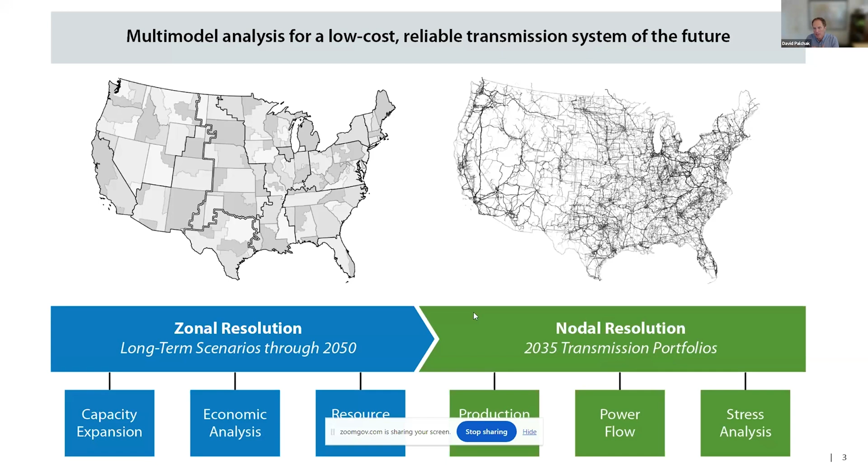So we do that for a few scenarios, and I'll show some examples. Overall, we're trying to get a lot of scenarios, understand the future challenges, and come up with several good solutions, hopefully.

As we build out our scenario framework, the most important part is our different transmission frameworks. You'll see these four transmission frameworks referenced in the coming slides, so I'll take a minute to explain them.

Our limited scenario is our reference scenario. Here we're basically trying to limit the amount of transmission that can be built across the US, so we don't allow any new interregional transmission. By interregional, I mean across the FERC 1000 plus ERCOT regions, so 11 different regions in the US. We don't allow new lines across those interregional seams, shown as black lines there.

We're also limiting the total amount of transmission to recent observed maximums. You'll easily see this in some of the results. We're looking at essentially the last decade, the last 15 years, at what was the maximum observed, and limiting the total amount of transmission that can be built in our capacity expansion model in this scenario.

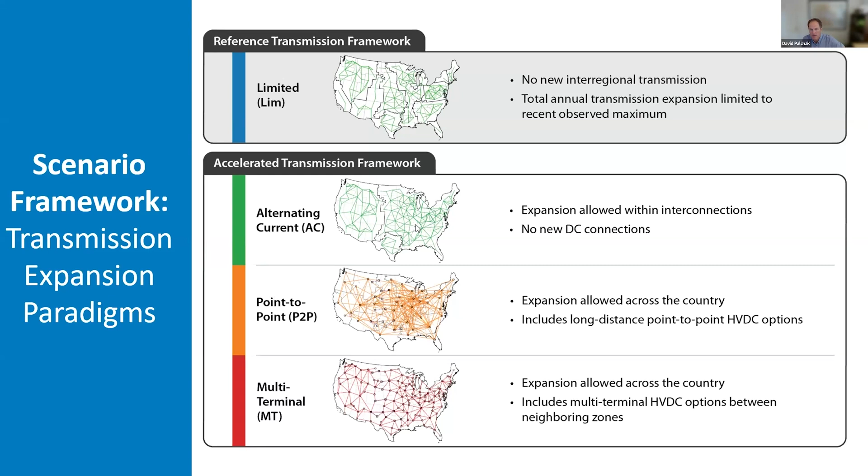Expansion is allowed across the country in our two HVDC scenarios, across the three seams between the eastern, western, and ERCOT interconnections. Sometimes we'll refer to those as our HVDC scenarios. So those are the four transmission frameworks or paradigms.

To expand our scenario matrix, we're also bringing in different demand growth. In the top right corner you see three levels: low, medium, high, which essentially goes up with more electrification of the system. I'll mostly refer to the mid demand in this presentation. In our high scenario, there's a lot of electrification by 2050. High is about 3% growth, mid is about 2%, and low is about 1% growth nationwide.

We also look at three different emissions targets. Current policies is essentially what was in the books by last summer—any state RPSs as well as the Inflation Reduction Act. Anything that was law by last summer is in our current policy scenario. We also have two emissions target scenarios: 90% CO2 reduction by 2035, as well as 100% by 2035. That's the White House target, but not a law. These are just our different decarbonization scenarios for the emission target.

So this is 36 total core scenarios, and this can be a little confusing. Ultimately we're trying to get a sense of the future and understand the role of transmission across these many possible futures. I'm not going to go into a lot of results on all of these, but this is how we set it up, and a lot of our results pull simple, common findings from all of these.

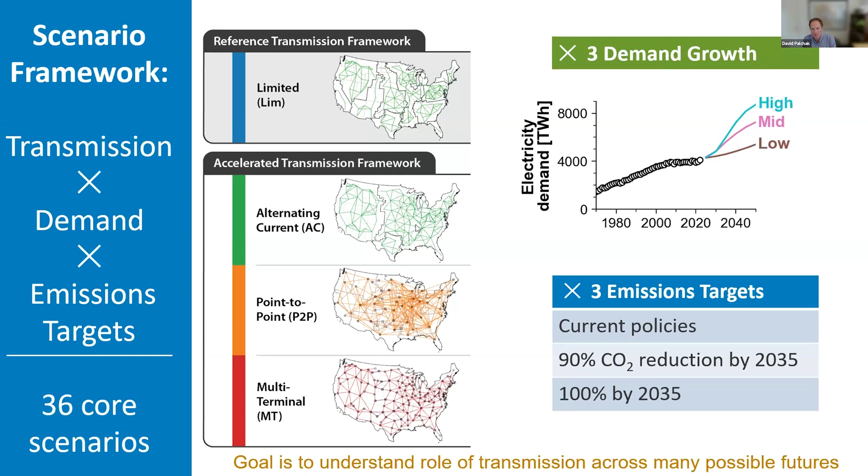I'm going to focus mostly on the mid demand, as I said—again, there's the demand chart. We sometimes call this our central decarbonization scenario, so I might refer to it as that. So a couple of results on this specific scenario.

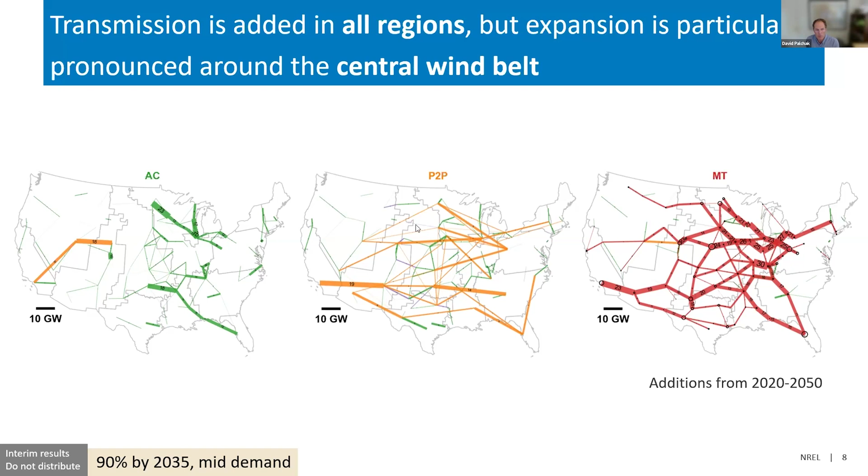Somehow I cannot hear David—can you?

Excuse me, Yohan? Oh, we lost you for a little bit. Am I back now? You're back, yeah. Sorry about that.

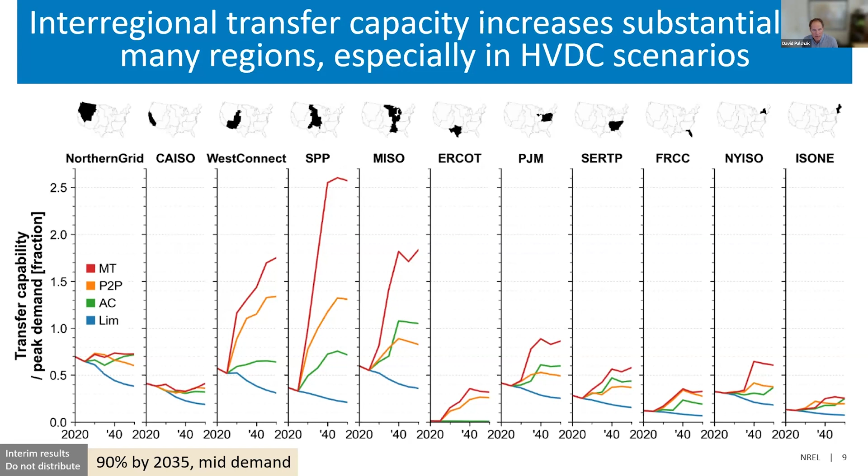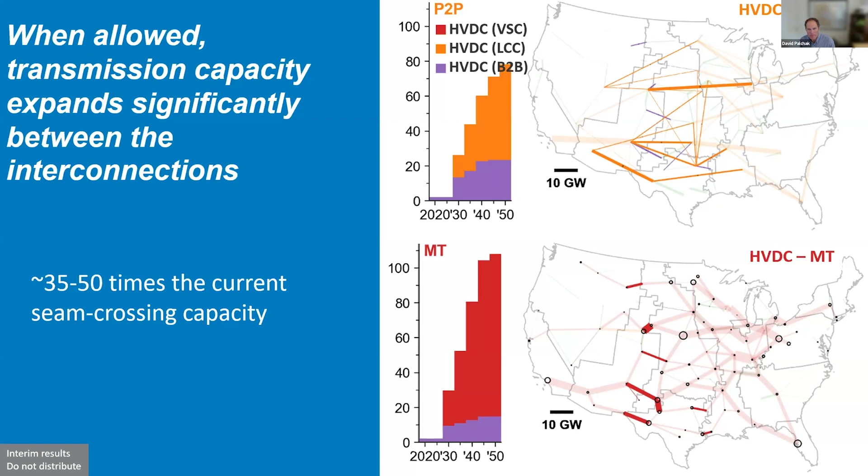So just to explain the charts a little bit - we break up our different HVDC technologies into the LCC and the VSC, and you can see them highlighted here on the map. They're also the back-to-backs that are expanded in some cases in the point-to-point specifically. So a lot of seam crossing capacity built when we allow it, especially when you compare it to today's.

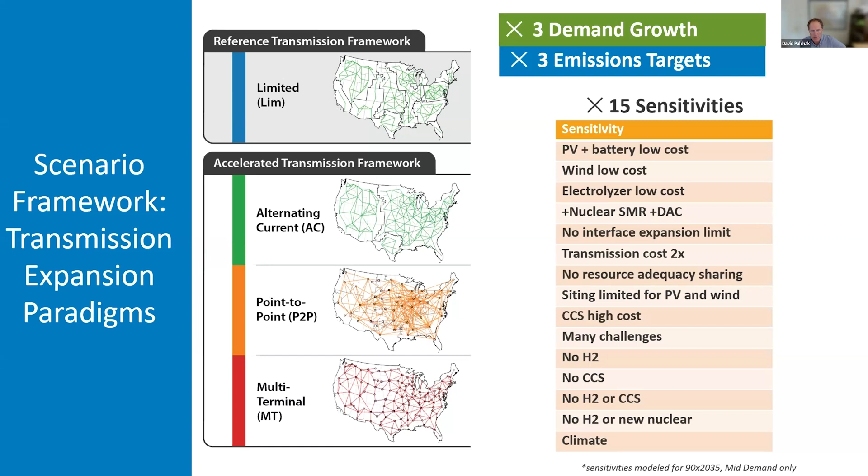If you go to the bottom, you'll also see we changed availability of different technologies, some maybe nascent technologies in the case of H2 and CCS or new nuclear - taking those technologies in and out to see what impact that has on the role of transmission in the future.

And to just kind of fly over what that looks like. So the spatial distribution of transmission is robust across a lot of these sensitivities. So the core scenario in the top left is what I showed previously for the AC paradigm. And if you look across all of these maps, this is the sensitivities of that paradigm.

At a high level, one of the good things is there's a lot of common solutions here that gives us some confidence that a lot of the solutions that we can come up with and distill from this would be common in many, many futures. So that's kind of one of the reasons we look at these maps and run all of these sensitivities, is to try and pull out the lessons across many of them, as well as some of the other additional lessons where you get down to the bottom row here, where we don't have some of the technologies.

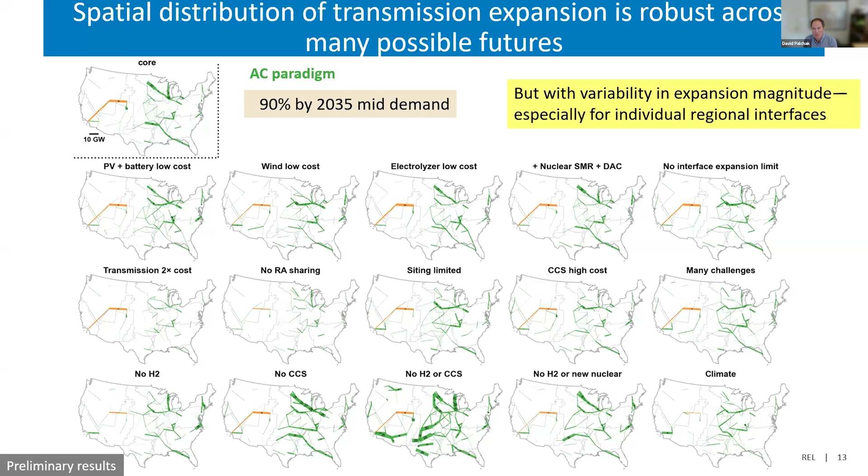Transmission has the potential to become even more important in those futures. But certainly a lot of variation in here as well.

So when we take all of those maps and try to distill them into a single map that we can actually move forward with, what we get is this. We call this the high opportunity transmission. So this is showing the new interregional transfer capacity that was essentially robustly developed across our sensitivities. So we cut off this number with, it had to be in 75% of the sensitivities I just showed. So if it wasn't in 75% of them, it didn't make it onto this map as our high opportunity transmission interface, just to give some perspective on how big the transmission still is, even with that somewhat conservative estimate.

If you look over at the PJM East MISO Central corridor, that is about 28 gigawatts now in 2024. They're looking at an expansion out to 2035 in this case by another 12 gigawatts. So a pretty large expansion. And then if you look out west in the Northern Grid South and West Connect North connection, it's about 2.5 gigawatts now, and they're looking at additional expansion of 6 gigawatts across our sensitivities. So still big expansions and a lot of opportunity here that is robust in a lot of futures.

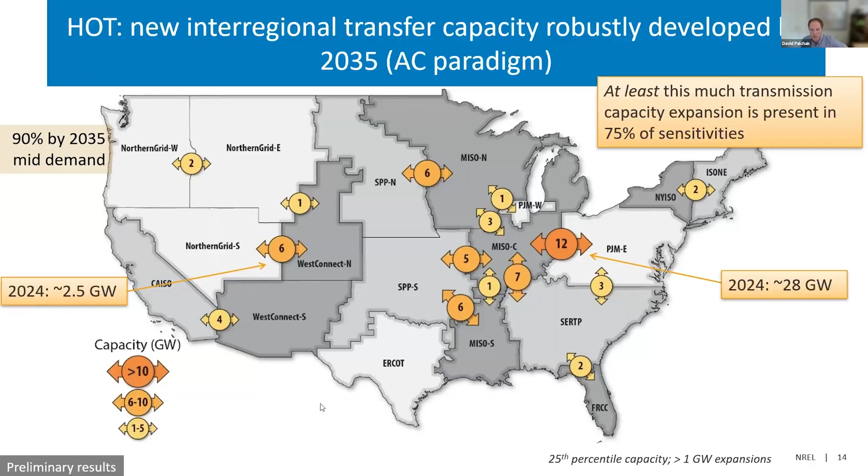So I'll quickly go through a couple examples of our nodal scenarios. So we ran 3 different scenarios nodally. It's quite intractable to have all 100 scenarios modeled, but this is really just to do some detailed kind of transmission planning and look at the engineering challenges of implementing these solutions. Certainly not a plan that we expect or is not a plan for the US, but really to try to validate and test our solutions.

And also look at analysis of grid operations, the scheduling challenges and the balancing challenges as well. Get some insights about how these futures could look. So these are our 2 nodal implementations of the AC and the MT HVDC. So that's kind of our HVDC scenario in this case kind of encompasses characteristics of both of our HVDC scenarios.

And ultimately, you see a lot of transmission, new transmission built. That's the highlighted lines here. A lot of 500 kV in our AC case, as well as some additional voltages, largely maintaining voltages within regions in some cases. And then our MT, getting into kind of a very transformative scenario in this case, a lot of connections across the seams, across the east, west, and into ERCOT from both interconnections. So kind of very interesting implementations here.

Ultimately trying to examine some of the engineering challenges and the operations and validate that these systems that we're looking at that are sometimes transformative are implementable when you start to get down into more detailed modeling. But again, just in the modeling phases here.

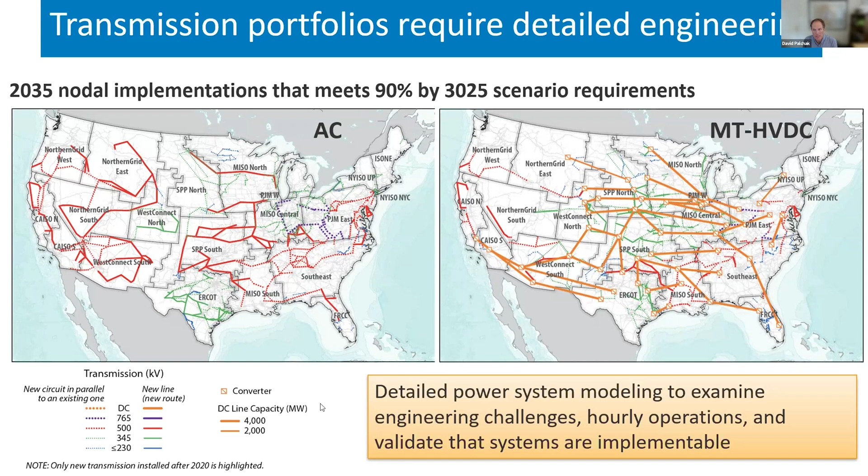So just to summarize here, so there's rapid and significant transmission expansion, and ultimately the HVDC scenarios build the most transmission. There are a lot of common transmission solutions, as we saw, and then the detailed modeling helps to validate that these are implementable, at least to the extent that we can model them, in those few scenarios. So I'm gonna stop there.

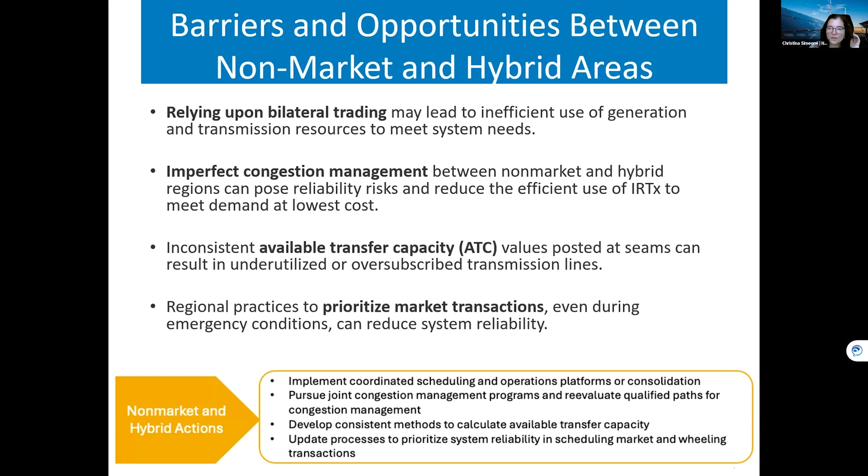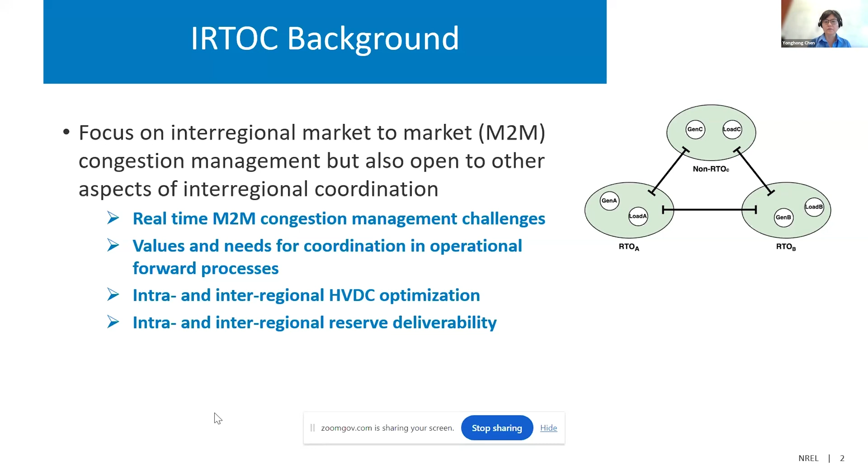So in reality, between two RTOs, the deployment of reserves from both sides can impact the flow across these two regions. This needs to be considered, so that when reserve is deployed, the system is not over limit.

So to summarize the three focus areas: the first is market-to-market congestion management on extra high voltage AC lines. This sub-area enhances the real-time coordination method to improve flow and price convergence, then coordination among more than two entities. In the existing market-to-market construct, it's only implemented for two areas. Basically, if you have more interconnection...

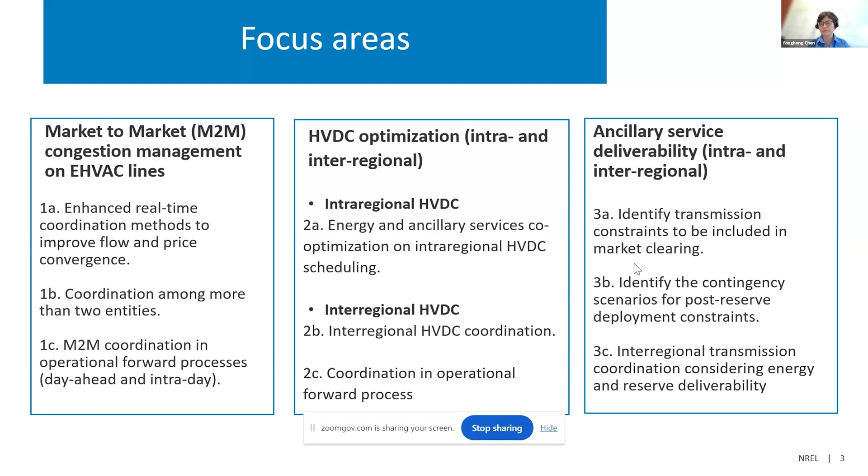The transmission line flow can be impacted by multiple areas, so there's certainly a need to look beyond two entities. The third focus area is basically in the forward process, like day-ahead or intraday. The second focus area is HVDC optimization, especially in the forward process, how we can schedule HVDC efficiently. But when getting into real time, it may need to be adjusted based on system condition changes. And finally there's ancillary service deliverability, both inter- and intra-regional.

So the next slide is trying to say that single RTO co-optimization really brought significant benefit. That's something we all understand. On the right side, I showed some benefit analysis from MISO and PJM. Both indicated that the market brought like $4 or $5 billion a year in benefit to the footprint, and of course that included both planning and operational sides.

If you look at the energy and ancillary service, MISO's benefit is about $800 million a year. PJM's energy production cost savings is $600 million. So they're a huge improvement. This benefit is compared between with market and without market.

Christina mentioned a lot of these themes, but if you consolidate these small, separate areas into one large RTO, there's significant efficiency gain. The RTOs really co-optimize system-wide constraints like power balance, transmission constraint, reserve requirement, and finally there's some relatively new development on flow considering reserve deployment.

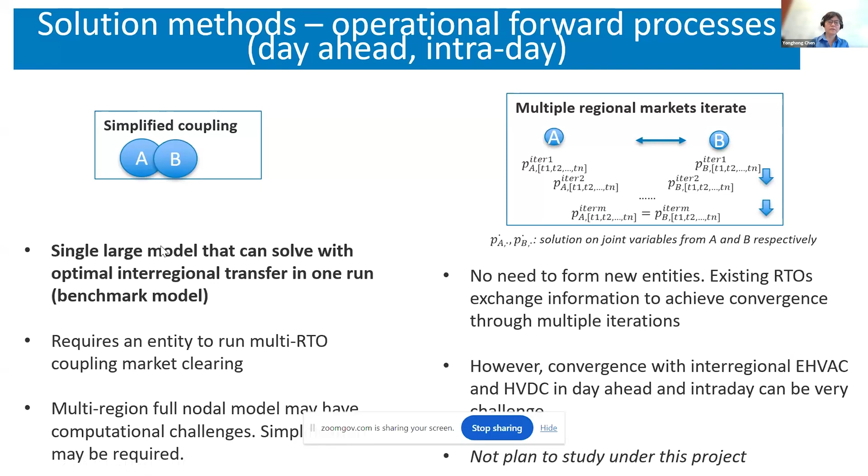So right within this project, we're not planning to study this solution method. We'll focus on the left side, potentially see what's the benefit of combined coupling, and then what kind of simplification may help us address some of the computational challenge. But we keep in mind that this approach will require maybe some entity to manage this joint clearing.

And then when we get into real time, it's more like a rolling clearing. So normally within one interval, it's a pretty short interval, 5 minutes, rolling. And then normally we don't try to achieve convergence within one interval. So like today, for both the joint coordinated transaction scheduling or M2M market congestion management, both sides can solve the problem, and after you solve it, you may still observe solution differences.

For example, for the same transmission constraint, the two sides may solve with different shadow prices, and that's okay. We just exchange that information and move to the next interval, and take into account the solution difference on these joint constraints, trying to drive convergence. So basically the convergence can happen after multiple intervals. In the meantime, system conditions may also change, so this process will take into account all these. Eventually, hopefully it will converge.

But there are still challenges with today's process. First of all, we need to develop methodology or algorithms to drive better convergence. And also, if we have a large number of M2M constraints, the joint coordinated congestion, the convergence can be even more challenging.

The first is M2M congestion management on EHVAC lines and HVDC optimization. These two problems we can look at together. It's really just within this security constrained unit commitment and economic dispatch, how we formulate this constraint, and then if it's across two RTO areas, you basically have to break that into two problems and coordinate this common set of constraints across the border.

In the real-time coordination, like this M2M across MISO-PJM, there's a benchmark model basically saying these two sides still have individual power balance constraints. The interchange schedule, the net schedule interchange, will still form the transactions, determined outside of the market. Each market clears their power balance equation, but they will coordinate on congestion management. So if there's a constraint across the border that is binding or violated, then both sides can redispatch to resolve the constraint. We're trying to achieve the cheapest redispatch solution. So this benchmark model basically has a joint transmission constraint formulation.

Of course, in order to solve this model, you need some entity to have information from both sides. Then you will be able to build a model and solve this problem and get a single solution. So you end up with a single shadow price for this joint constraint, and that reflects the cheapest redispatch option from both sides.

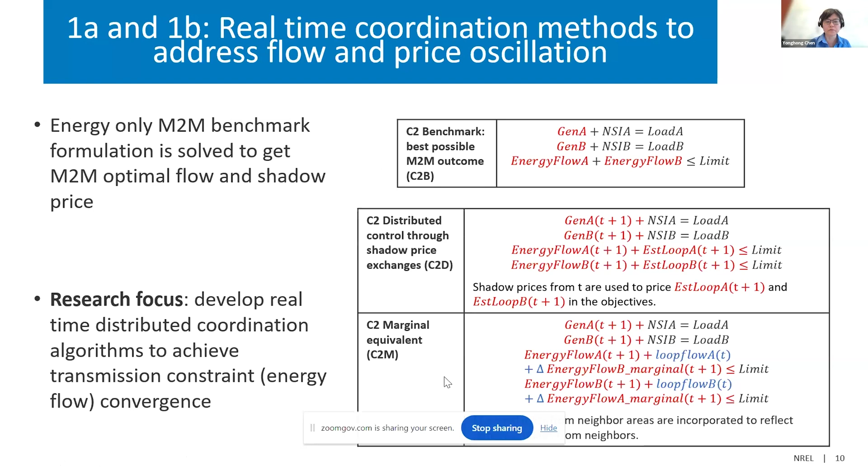And then we compare these three different methods. The benchmark gives us the benchmark result, and both the distributed control and marginal equivalent methods require multiple intervals to converge to the optimal benchmark result.

So this is a summary of where we are and the observations of this method. This distributed coordination through shadow price exchange is really purely based on price, and you have to guess how much relief the other side can provide. That can sometimes cause slow convergence.

We tested this method on a 5 bus, 96 bus, and also a small 4 RTO model. Then with the marginal equivalent approach, because you get the full marginal unit information from the other side, it gives better convergence. But it's challenging to determine the marginal unit, especially with energy reserve optimization, and if the reserve definition differs between two RTOs, that can be even more challenging.

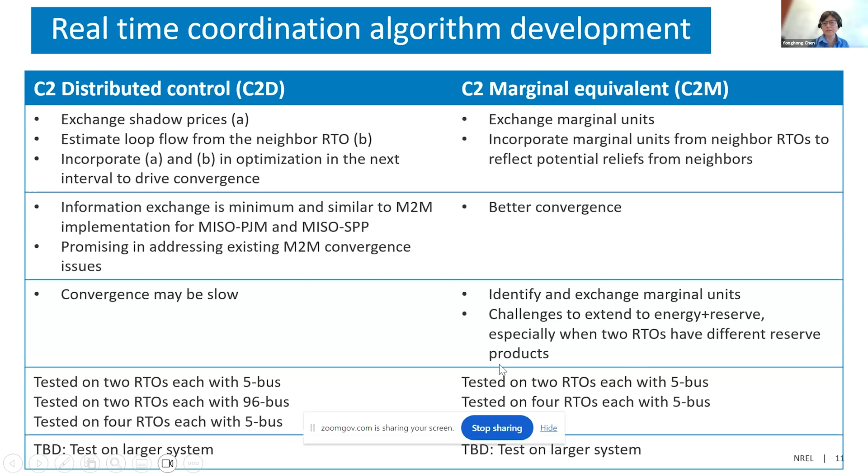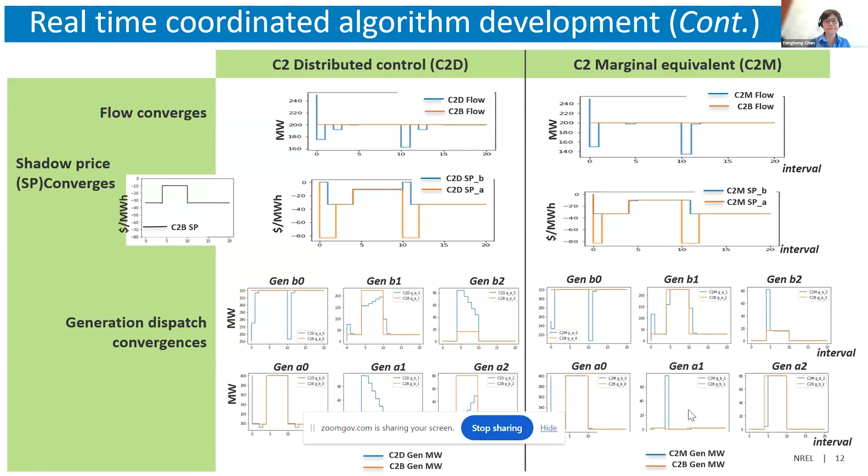So the forward process is much more interesting. We mentioned we're not planning to explore this kind of distributed algorithm further because there are just too many constraints. For example, one RTO could have over 200 transmission constraints binding, and if you exchange shadow prices trying to get convergence on all these constraints, it will take significant effort on the algorithm development side, especially with non-convexity involved.

So here we're trying to first build the benchmark model, and then the C2B. The current practice is normally that one RTO, the monitoring RTO, will consider that constraint in clearing, but it has to estimate the loop flow from outside, which is normally pretty difficult, especially for these lines across the border, to get it correct in the forward process.

So we'll build some model, but of course you have to have some estimated loop flow for this approach. We also developed a simplified coupling approach. We can formulate the coupling problem, but then when we solve it, we can, for example, use LP relaxation. Of course, the European method is to simply go to the zonal approach, but I think within the nodal framework we can still explore some simplification.

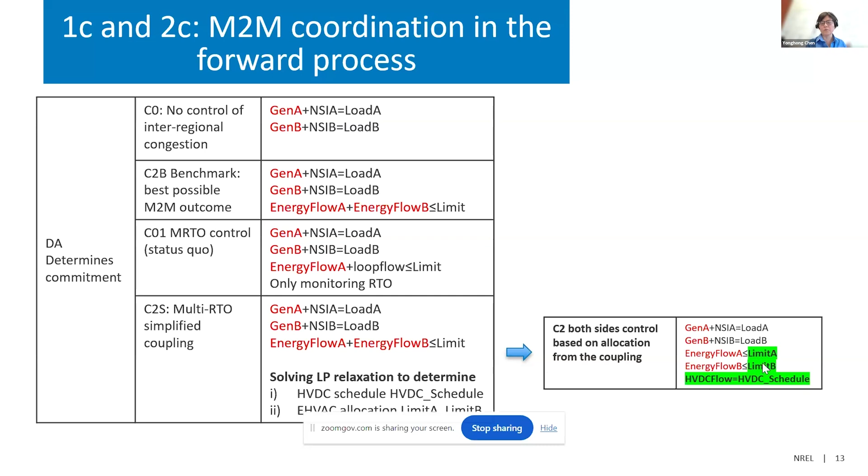After we solve this first round simplified model, we can figure out the HVDC schedule and the flow allocation across areas. For the interregional AC line, we can try to figure out the flow allocation for each RTO area, and then they can take this to run a more detailed clearing within each RTO. As for HVDC, I'm not going to talk too much about it.

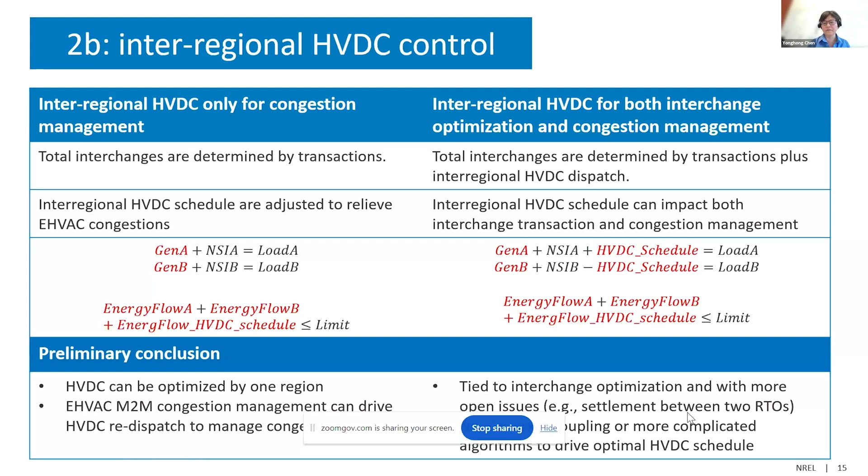Next is the multi-stage aspect. We talked a little about day ahead to intraday to real time, and you could have a different coordination or solution approach. Yesterday we mentioned that after testing all these different stages, day-ahead basically gives you commitment, and real-time gives you energy and reserve dispatch. How should we evaluate that?

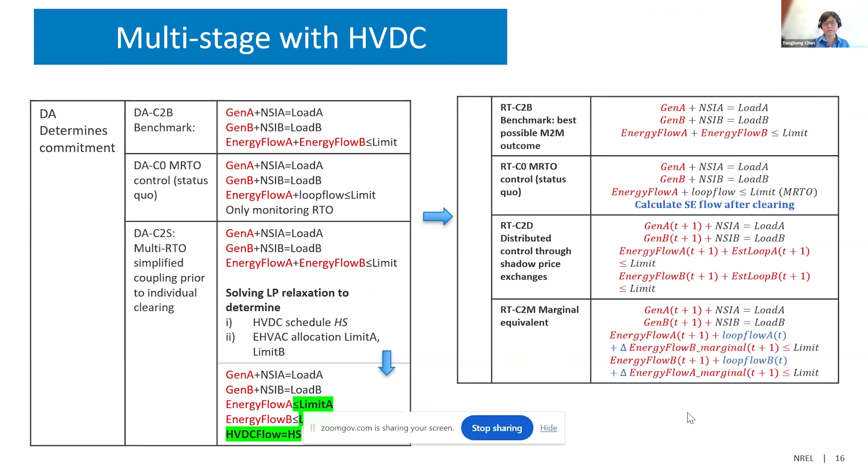Within Sienna, we're also in the process of building something called emulation, basically plugging in this commitment dispatch solution and then ultimately testing what the flow and the reserve deployment will be, what the production cost, flow violation, and combined cost look like.

Here's one example with this RTS 96 bus system, including HVDC. At this stage we duplicate the system to make it like two RTOs, and then explore the different multi-stage combinations.

So here we compared if we do perfect M2M clearing versus no coordination at all on this inter-regional line. The third one is the simplified coupling, like we mentioned earlier, to clear them together with LP relaxation, figure out the flow allocation and HVDC schedule, and then do the individual RTO clearing. Of course this is a very simple example and a very preliminary result.

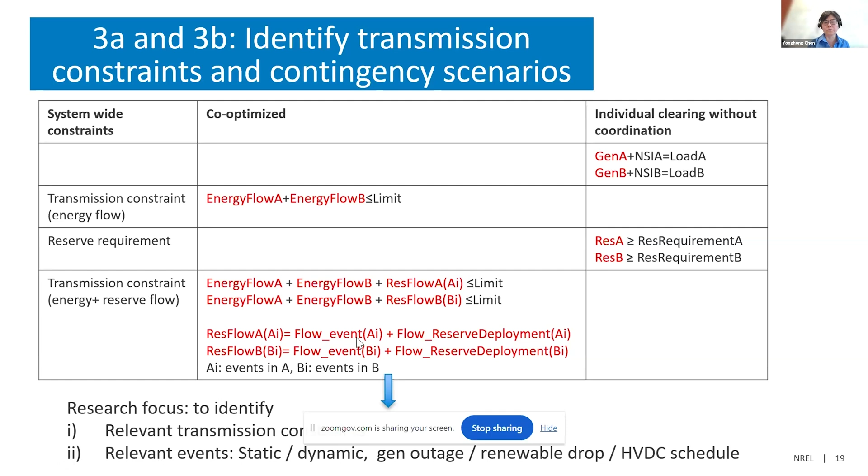So there's a research area to identify the right transmission constraints and relevant events to be formulated or added into the optimization.

This interregional transmission coordination really gets into real time. Even in the EU, in real time there's no coupling, each RTO solves the problem independently. But if you observe the interregional flow violation, how are we going to consider reserve deployment as part of it? Earlier I showed results on energy flow only.

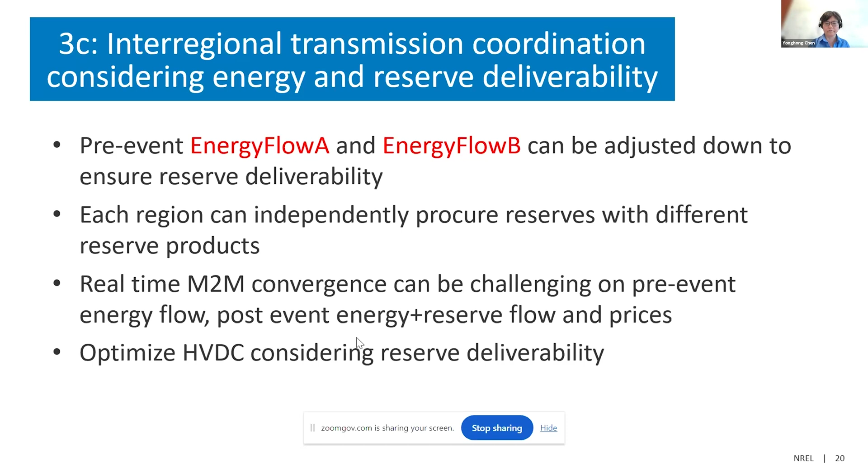Different methods can drive convergence, but if we consider reserve as part of it, it's actually much more complicated. We have some preliminary results, and it's sometimes difficult to converge to the global optimal solution.

Another piece is that in the multi-stage setting, we should also look into the uncertainty. The reason we have intraday is that the forecast data may have high uncertainty, and if you get better information intraday you need to re-optimize. We recognize that problem, but at this stage, within the scope of this project, we're not planning to develop a good dataset for the uncertainty.

We're just trying to do some kind of reasonable approximation and then reflect that into the multi-stage framework. And finally, it's just a summary.

We're building the framework in Sienna, focusing on multi-region, multi-stage congestion management, and real-time emulation to consistently measure these different configurations and different solution methods. We also incorporate intra- or interregional HVDC and the reserve deliverability.

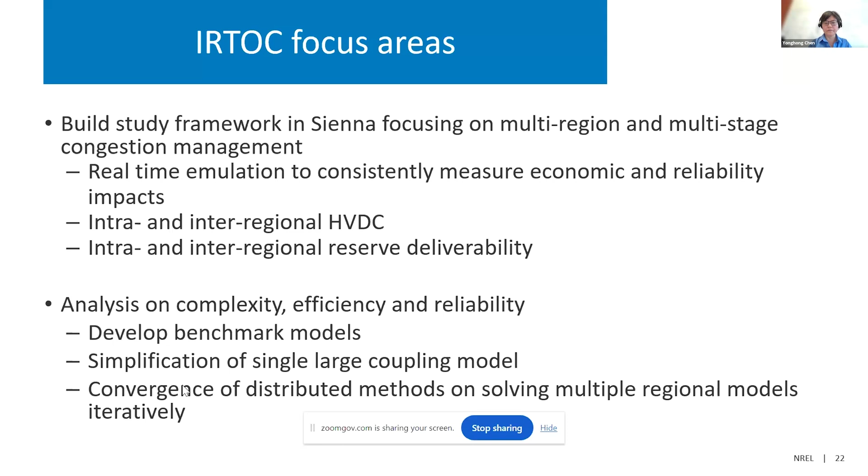This framework will hopefully help us analyze the complexity, efficiency, and reliability, and this benchmark model will give us some kind of benchmark—what's the best outcome we can achieve? We're really looking to simplify the single large coupling model, and also the distributed method's convergence by solving multiple regions iteratively. With that, I'll end my presentation.

And I'd be happy to take any questions.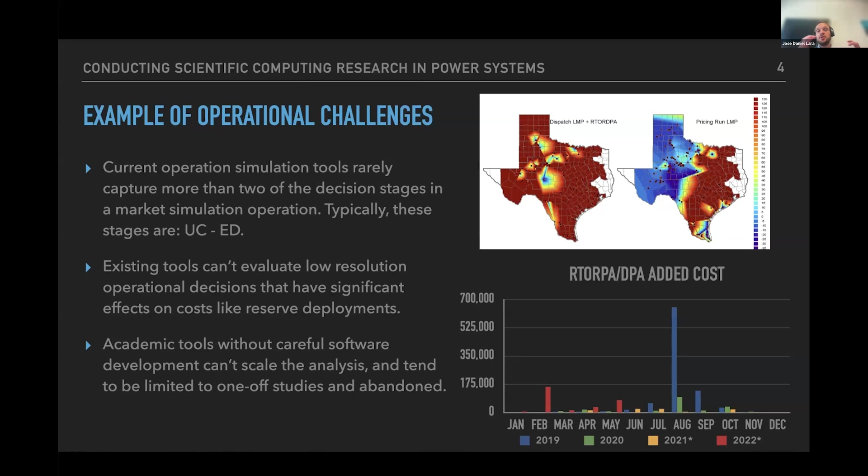So Power Simulations.jl is the base library where we're developing all of these capabilities. We basically focus on three main contributions. One is on the software engineering side—we're trying to define how we should engineer software for applications like this using modern concepts in power systems and in software engineering. We also focus a lot on the power systems modeling.

How can we keep the representation of particular power system applications and make the problems still scalable? And of course, mathematical optimization, which allows us to say, how can we solve these problems more effectively?

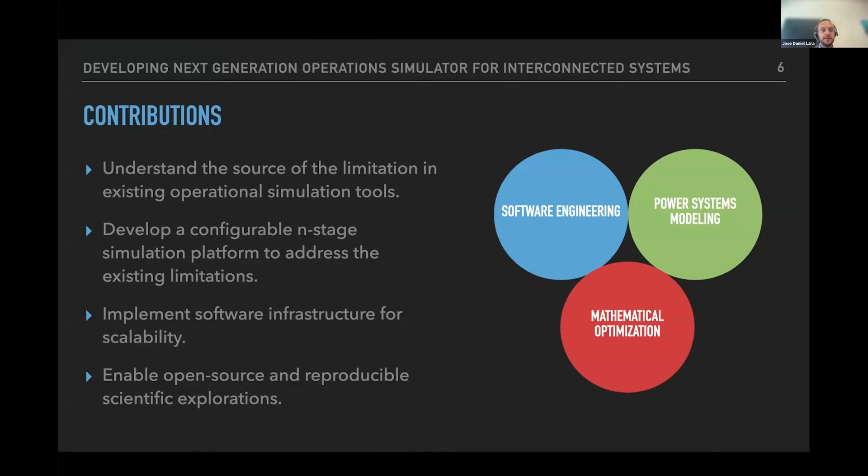The way that we formulate an operations model in power systems is distinct from classical power production cost models that have a single monolithic model employing a lot of switches and parameters such that you can arrive to different kinds of models.

We actually think about composing those problems and models by collecting a set of cost functions, a set of device-by-device models that are distinct from each other at the branch level or the injection device. We couple them together in a particular representation of the network, then couple all of the services, and use feed forwards as a way of sharing information between different models that have distinct formulations.

So what this allows us to do is, people ask us, what is the model of Sienna? Well, in Sienna, there's actually no model, right? There's no single model that you use. You compose it depending on what kind of

templates you create and employ. So you can arrive to models that are more similar to MISO, or more similar to CAISO, or more similar to other European markets, depending on how you want to formulate each one of the devices and how you encode the rules of these systems as part of the resulting model in Sienna.

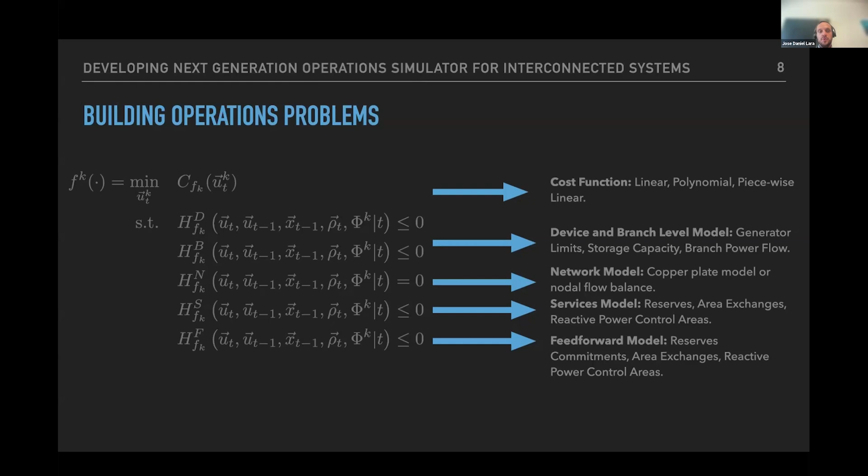So how do we use this, right? We go from this set of equations, and this is actually how that looks like. We start from a network model, for example a PTDF network representation that has its own assumptions.

And then we define, as you can see on the right, how we want to model each one of the components individually and the reserves. So that's how we approach building models in Sienna.

And that allows us to have a lot of flexibility about how we want to simulate, for example, if there are different rules for dispatching storage into different RTOs.

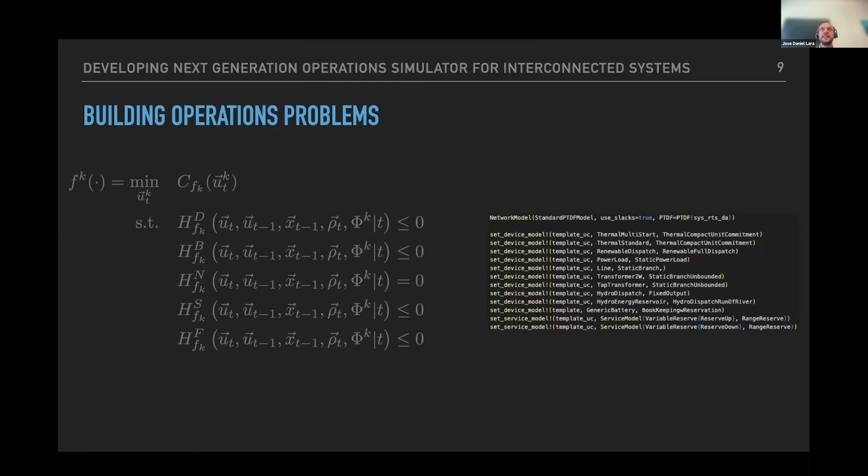We can actually say I want an RTO that has its own model of storage and another one that has a different model. Or if I want to simplify an RTO, I can go into one RTO and say I want to model this one just with some basic dispatch, or I want to model this one with a detailed unit commitment.

Right? So the other important concept of how we actually develop software for this kind of application is that we have this tree-type structure in how we think about the simulation.

As I showed before, every one of the devices has its own model that creates an operational model. And every one of these operational models, again, because it's not monolithic, they're different from each other. So every one of these then gets all tied together inside of a simulation model that combines them.

What we call a simulation sequence. And the simulation sequence is the one that defines how these different models share information.

One of the innovations that we have in Sienna is this type of modeling, right? Because at the end of the day, one operation model could be a bunch of merchant operators just submitting bids to the market, and then a separate operation model could be the market clearing, and a separate operation model could be, for example, the supplementary ancillary market.

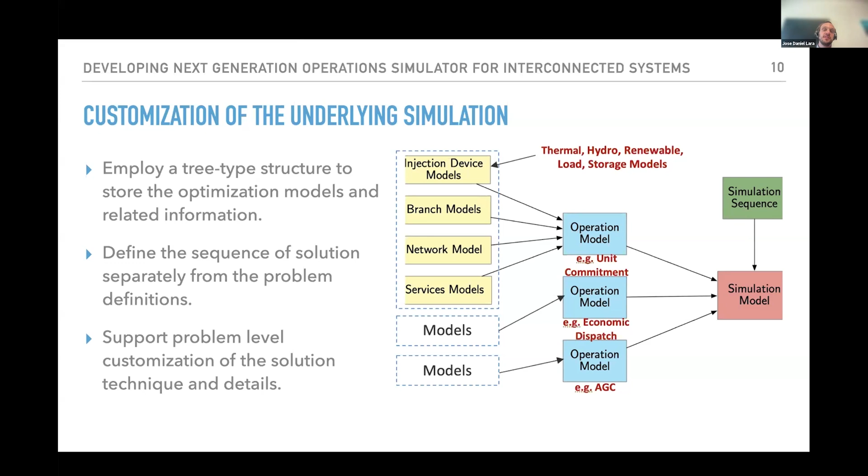So if you were trying to put all of this complexity into a single monolithic formulation that you modify through switches and parameters, it becomes really unwieldy. So what we have here is this kind of disjointed approach, and we employ the simulation sequence as a way of coordinating them. So how do we formalize this a little bit more?

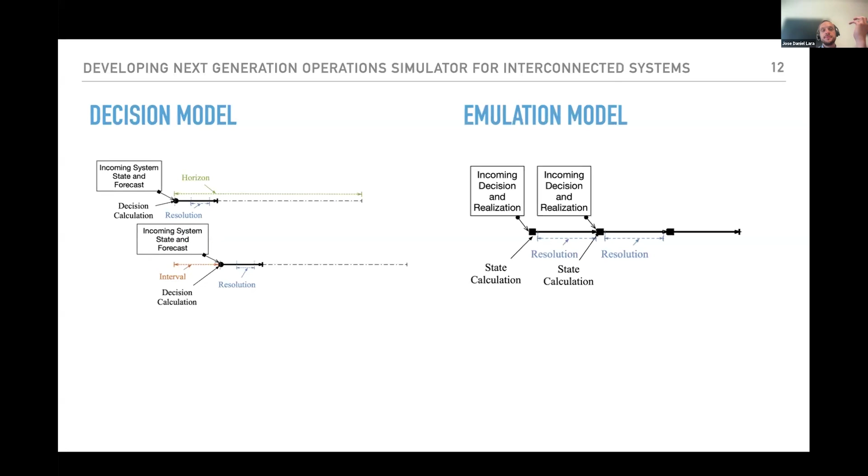Because it's not just the software, but how we formalize this sequence. So in Sienna, we have a distinction between decision models and emulation models. And Yunhong alluded to this a little bit inside of our previous presentation.

So a decision model essentially is able to operate over a horizon most of the time. Of course, you can always make a horizon of length 1, which makes it narrow-sighted. But in general, we think about decision models as having a horizon, and they define an action variable u,

which is a decision variable, over a function that takes into account the state of the variable, which is x, and the previous decision. So the previous state of the system, the previous decision that was taken, a set of parameters rho, and a forecast, phi t.

So in this case, phi is the forecast available at time t. We issue a decision, every one of the decision models issues a decision u, and then the emulator evaluates what is the response of the system to that decision. So we solve this system of equations G, which could also be formulated as another optimization problem, but made mostly out of equality constraints. That emulation model takes the state that solves for the current state of the system, takes into account the previous state of the system, the decision taken for that period, and the realization of the forecast.

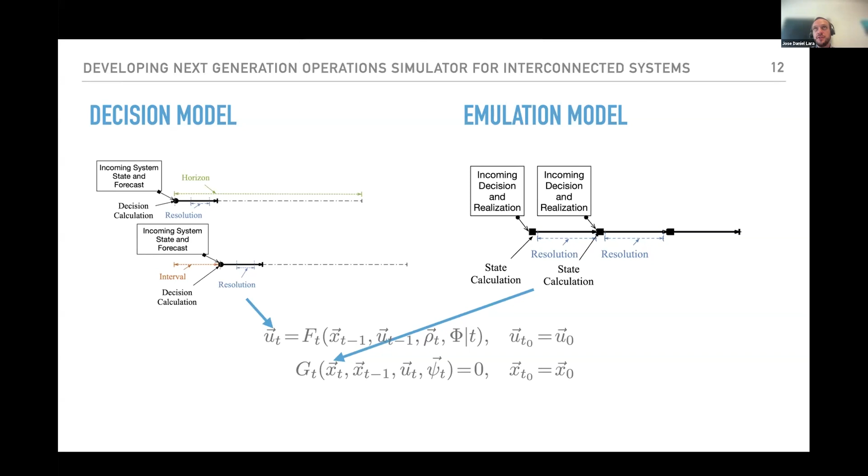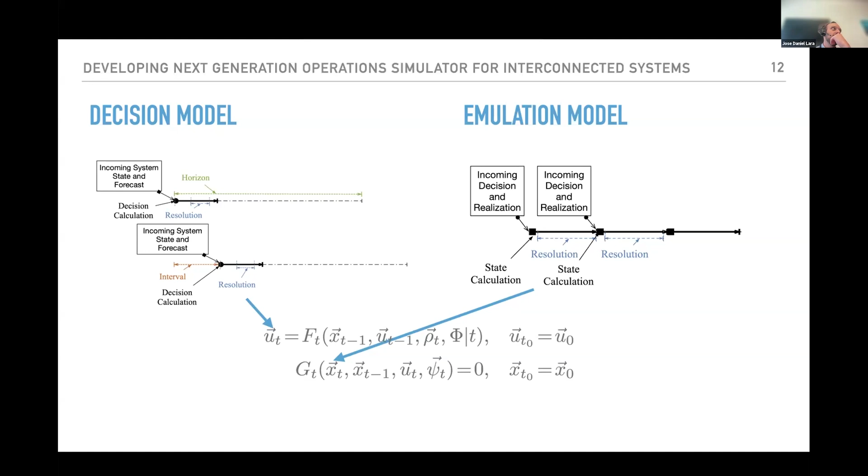So in this method, we actually separate the way that we simulate, we think beyond modeling. When you think about the words, it's like production cost modeling, but we think beyond production cost modeling and move more into operations simulation. So we can simulate the operators making decisions with the information they have, this phi t, making decisions with particular sets of assumptions, and then having a model to evaluate what is the actual response of the system to that decision.

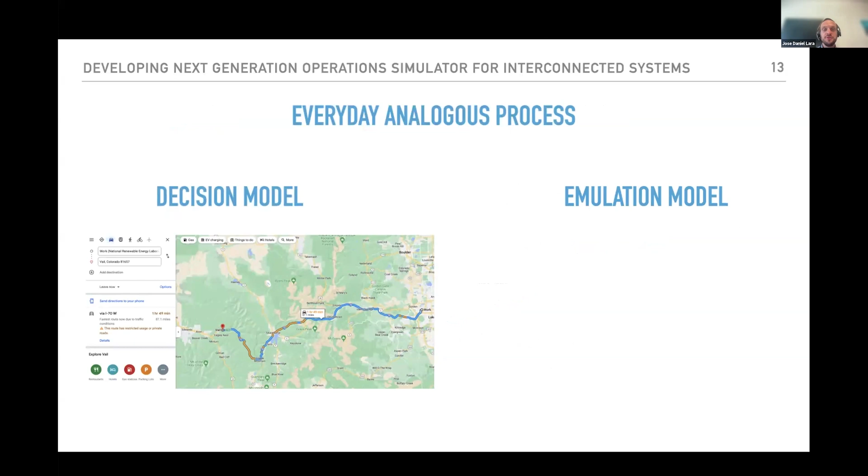So making it analogous to an everyday process, a decision model is similar to you taking your GPS - we're here in Colorado, so if we want to drive to Vail, your decision model is going to tell you this is the route you should take, take a left turn, take this exit on the highway. An emulation model is actually what happens when you're driving. Your GPS says it takes about 2 hours to drive to Vail, but if you're 1 hour into your drive and there's a car crash, your emulation model says, okay, how do I adapt now to the fact that I need to take a different route, or the change in the time I expect to get there. So the emulation model is to capture that.

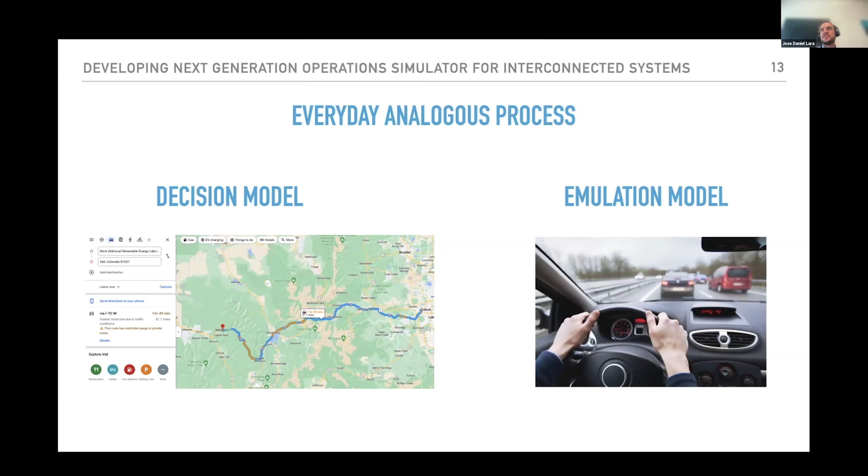Because so much of the processes that Yunhong and the project describes are based on the state estimator and sharing information, this is where the emulation model becomes really critical. It's kind of like a central model that represents what happens in reality, subject to the imperfect decisions taken by different RTOs.

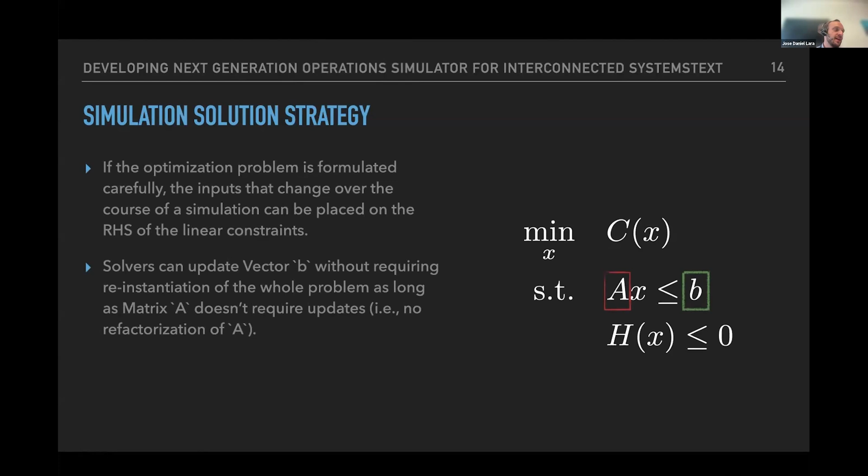One of the things we also do is have different strategies to make this scalable and large. One of the ambitions for this project is that we can run this in NTP. So we formulate a problem in a way that most of the time we're updating the right-hand side of the optimization problem, because we don't require rebuilding the matrix A or refactoring it. In general, solvers are pretty good at updating and resolving after updating B, and the incumbent solution actually speeds up the solution over the next step.

So just to keep a small example here, we observe, even for RTS type size cases, over 30% increase in the speed of actually solving. This is, for example, a model that has a unit commitment, an economic dispatch, and a power flow for the emulator. The difference between rebuilding and not rebuilding changes about 30% of the speed on a single laptop.

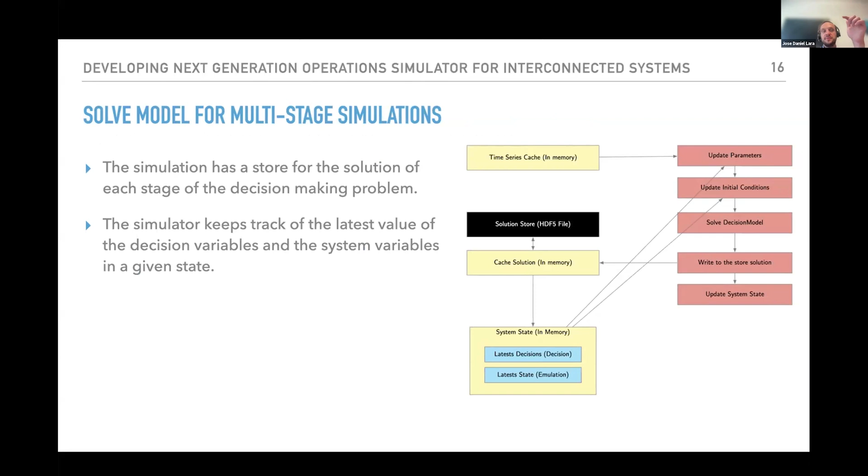So the way that we actually solve multi-stage simulations under this design is that we have the time series cached in memory, we update the parameters of the models in the right-hand side, like I described. We update the initial conditions, we solve the decision model, we cache the solution into memory, and then after all of the decisions have been taken as part of the sequence, we go back and try to update what is the incumbent decision and solve the optimization problem that tells us what is the current state of the system with the emulator.

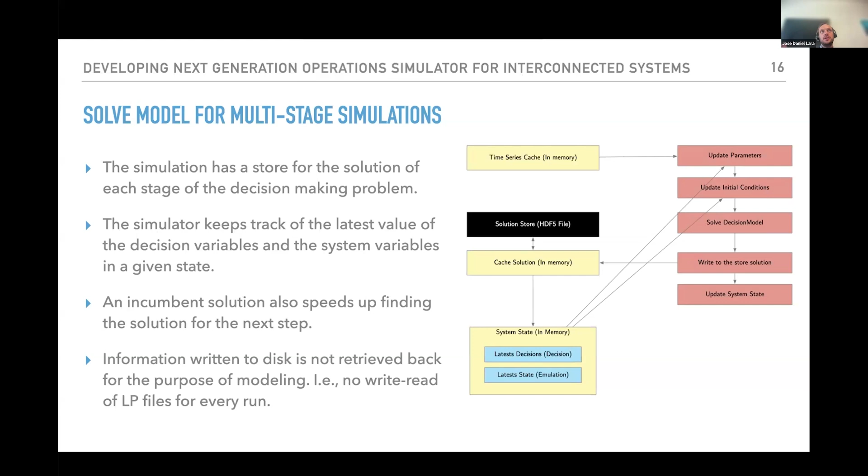Part of the software engineering effort is that we minimize the amount of interactions with the disk, especially in HPC systems or cloud systems where these writes to disk for several types of applications are done over the network. We can optimize those applications to the max. So we don't write LP files, we don't write CSVs. We actually have these specialized types of file systems that allow us to do this quite fast, trying to balance memory usage and the speed of compute.

I think Jared was going to talk in more detail about NTP, the National Transmission Planning Study, but this is the type of system we want to solve these problems on.

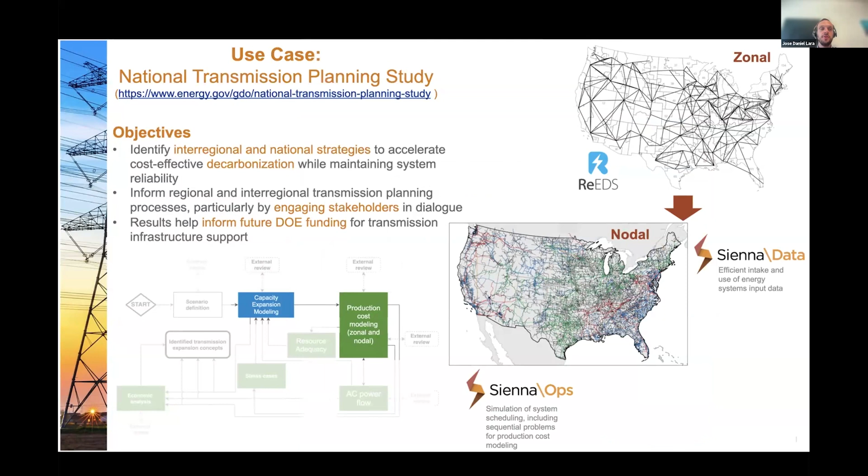Now, one of the differences between models of this size and complexity representing real-life operations of large interconnected areas, when we want to model market to market, is that generally the academic literature thinks of it as two subsystems with an exchange we want to coordinate, where these two subsystems are two RTOs or ISOs, or just two markets that you want to operate.

So our objective is to develop a simulation platform that captures more realistic topologies and more realistic problems observed in the system. If we stay with this particular approach, there's plenty of academic literature that has looked into this, looked into ADMM, decomposition, etc.

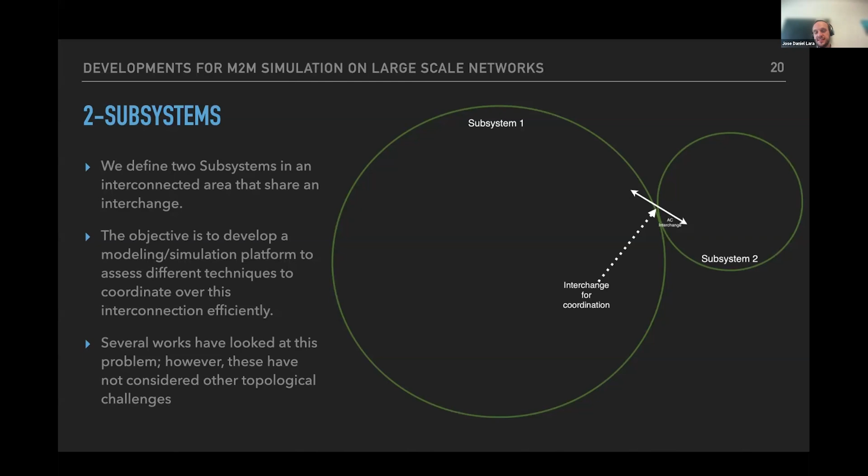However, in real life, and in the data sets we've built, every one of these subsystems is actually far more complex than just coordinating unit commitment with the flows in between. Because every subsystem is composed of several balancing areas inside the RTOs, and these balancing areas are sometimes connected using AC interchanges that are normally controlled in flow for reliability or reserve reasons.

But then within the whole system, there are also asynchronous regions separated by HVDC lines. So you need to be able to balance the RTOs, the synchronous regions, and within the synchronous regions, the balancing areas. This creates a lot of complexity when you want to calculate things in a computationally reasonable way.

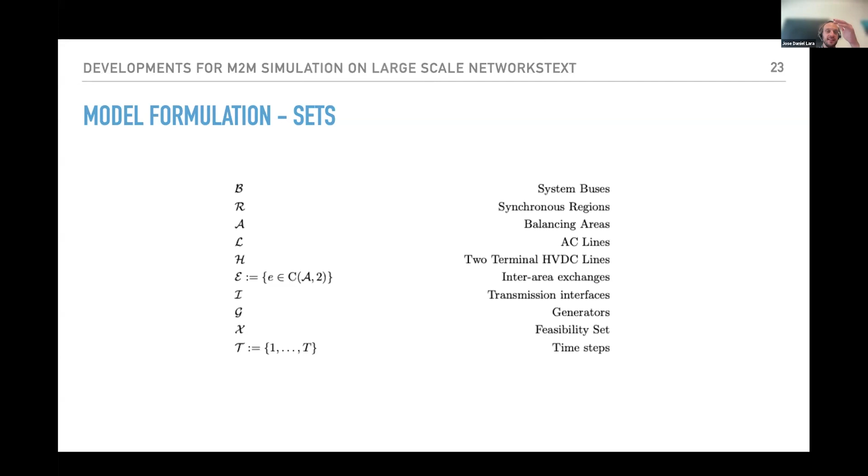Then we have these inter-area exchanges, which essentially are made of this kind of combinatorial combination of different areas. We have the transmission interfaces, and for the sake of simplicity, I'll just create a single group of generators, but assume that those are like gas, hydro, nuclear, renewables, etc. We have the feasibility sets for those and the time steps.

Now, where it starts getting complicated is when we have to start indexing and finding all of the different pieces that make up the models, that make up this network formulation.

Because we need to distinguish which subset of buses are in a particular synchronous region, which subset of buses are in a particular area. As I mentioned before in this scheme, we have buses, and we need to identify which buses are in the green circle, which buses are in the purple circle, which buses are in the red circle. So we have to index all of those.

We have to find which generators are in the green circle, in the red circle, and in the purple circle. We also need to identify which HVDC lines are assigned to each interface and which AC lines are assigned to each interface. We also start needing to identify which buses are crossing HVDC.

Which are the buses from and to of each HVDC line, such that we can tell if a particular bus is in a different synchronous region but contributing to the exchanges through HVDC. And we have to do the same not only for synchronous regions, but for areas. Is this HVDC an embedded HVDC, but connected between two areas?

We also need to identify that for the AC lines, which lines are inside of a particular synchronous region. Now, the good thing about AC lines is that they will never be in between synchronous regions, because otherwise there wouldn't be a distinction between the synchronous regions.

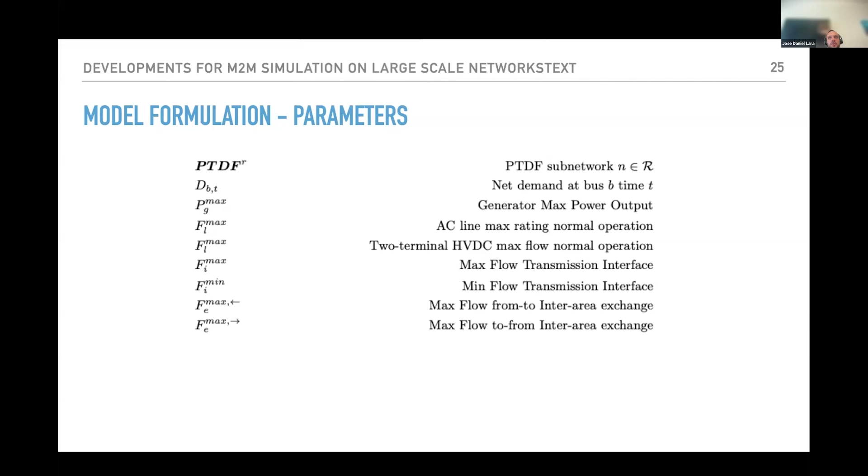So for the model formulation, one of the things we use in the software is that we actually reutilize a lot of expressions. In Sienna, we're able to keep track of expressions as objects so that we can reuse them. So we keep track of two types of expressions.

One is the net injection at a bus—that is essentially the demand minus the generation. And then we include the HVDC here, because the HVDC allows us to calculate the injections that go into the PTDF flows. Then the flow of every line is essentially the row of the PTDF times the injections of every bus.

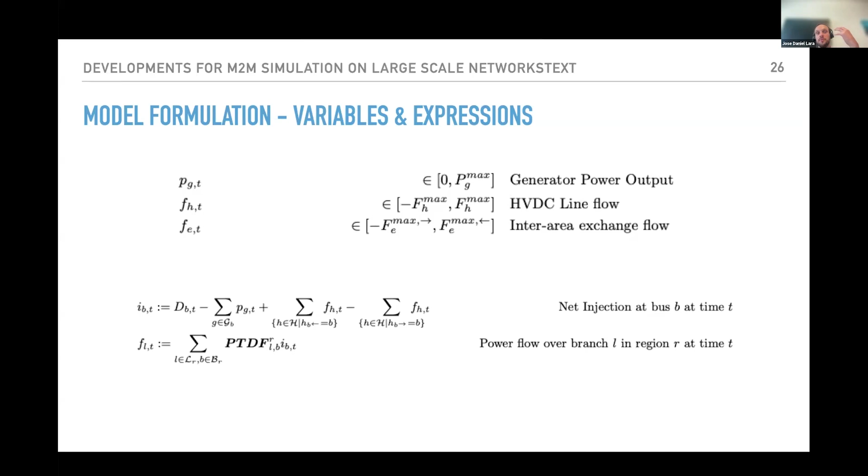For models of the size of NTP, we have to apply a lot of techniques to get these PTDF rows: sparsifying them, reducing the number of lines, collapsing buses that are radial. I won't go into many details, but essentially at the size of the system we want to solve, this flow is the best estimate we can have, given the simplifications that need to be done.

To make the model solvable even by commercial solver standards, the model formulation at the end of the day, when we collect all the constraints together, kind of looks like this. Our generators at the top level have the feasibility sets for the different components—generators, lines, HVDCs, and exchanges. All of them have to be feasible, which in most cases means that they're within the bounds.

The generators have to have, depending on the model you're using, their minimum up and down times, their ramping, etc. So the first constraint is the synchronous region power balance: all of the generation in a synchronous region, plus and minus the HVDC inputs and outputs, have to meet the demand for that synchronous region. That's the baseline constraint.

The second constraint is a power balance over the area. One of the tricks we use in this formulation is that instead of adding all the AC lines connecting different areas, we use the idea of exchanges—a single flow variable that collects all the flows of those lines. So if you have 3 lines connecting 2 areas, that's the net exchange. We have our generators in the area minus our flows in and out of HVDCs for the area.

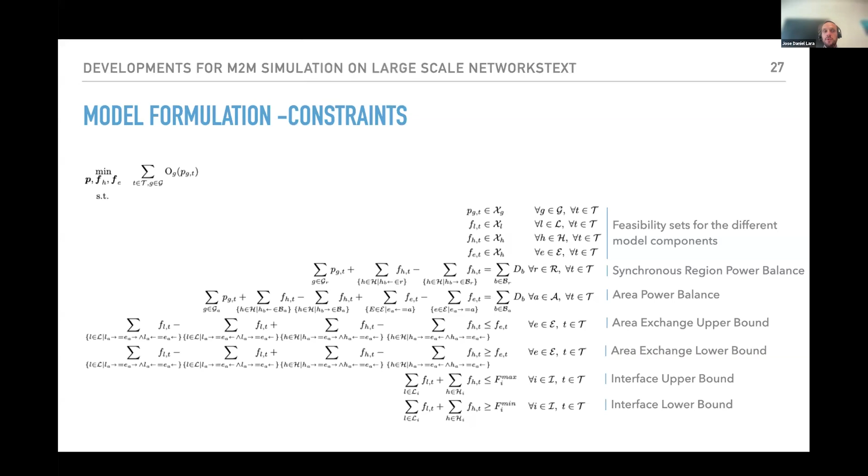Finally, the last set of constraints are the sum of all the AC lines and DC lines that make up the interfaces, so we have a maximum and minimum over the interface. If you look at the complexity of balancing all these areas, even though we've conducted significant research on the existing academic approach, this level of balancing has not been explored yet when you actually have to implement it like that.

So the implementation of the simulation is a work in progress—we're trying to implement all the different methods that Yonghong explained, where we do the benchmark model, then do the coordination through the flows, and then use the values of the system.

What we're implementing is a workflow that looks like this in a new package called Power Simulation Decomposition, which will allow us to implement not only some of these methods but also decomposition methods to scale up future studies similar to NTP, where we can solve this benchmark day-ahead problem. From that benchmark day-ahead problem we can get the commitments, the reserves and ancillary services, and the interregional flows. We can fix those, and for every simulation of the ED steps, we can re-read them. This diagram only shows 2 regions—if you add more regions, it grows in complexity.

We read variables from the state, then solve the decomposed problem in R1 and R2, update the power outputs of those, and solve for the emulator, where we could even inject uncertainty. We can solve the ED with a particular forecast, but then inject a different realization of the renewables, such that this effect of using the previous time step from the state estimator includes effects of deviations from the state estimation versus reality in the emulator.

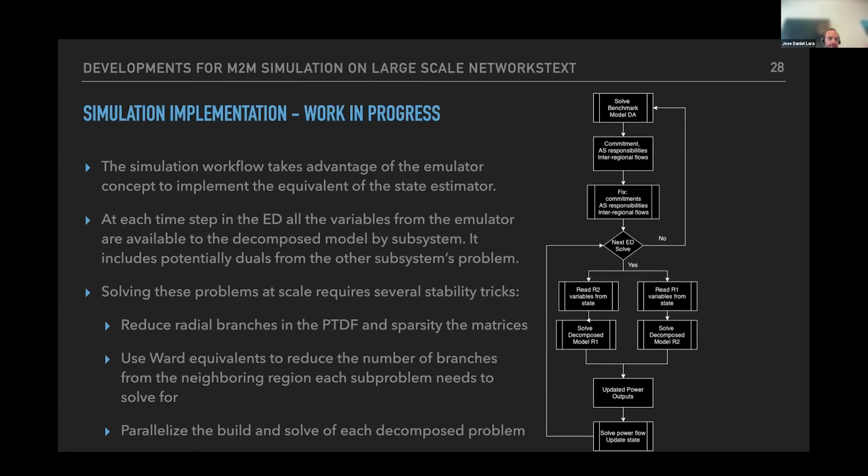And then we also parallelize the build and solve of each decomposed problem.

Thank you very much. We keep working on this. This project is pretty exciting for us from the software perspective — it's probably one of the more complex ones we're working on these days.

Check out Sienna. We're going to keep updating the package to hopefully make the coding production quality, such that these kinds of simulations can be conducted, given the interest in regional transmission coordination. These types of developments are pretty important because there aren't that many tools out there that try to formalize this type of operational simulation.

I don't know if there's any questions.

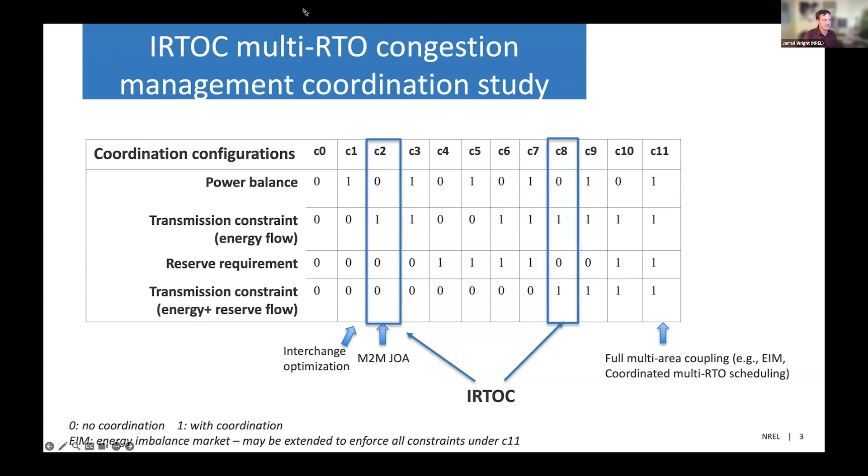This is only for information, and this had already been described, but I thought it'd be important to remind everyone of level setting as to where we're intentionally focusing our attention as part of this specific project. As Yonghong had mentioned, the project so far has gone from the left to the right-hand side, but not necessarily to the complete right-hand side.

So 5 bus test systems, 96 bus RTS test systems, and then going towards this subset of the Eastern Interconnection, which would be in the order of thousands to potentially tens of thousands of buses, depending on the part of the EI that we'd like to focus in on. We do want to focus on a subset of the Eastern Interconnection, likely the regions between MISO, PJM, and SPP, making sure that as we walk through these different levels and take the crawling, walking, then running approach, there may be some intermediary steps before we go to that large scale. So I just wanted to note that here as well.

The project is still in progress, and we'll see how we go through the levels of complexity and the computational challenges that we potentially see as we implement in software, specifically in Sienna, that Jose had provided that background for, a consistent evaluation of the economic as well as reliability impact. So how complex is it going to be? How tractable are these models? The efficiencies, looking at production cost as an example in that emulation type of environment. And then, of course, reliability impact, so the potential for shortages or relative flow violations between regions.

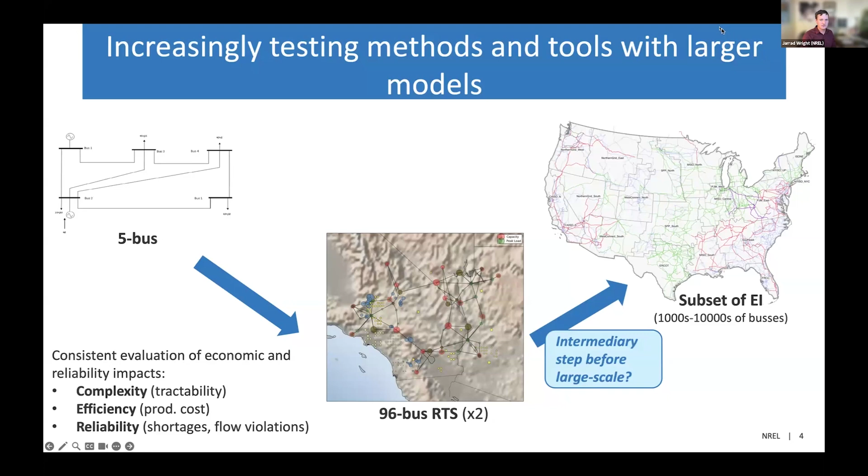Now, more specifically on that subset of the EI, this gives you a summary from NTP where we are leaving off. The temporal resolution for the production cost modeling at a nodal level within the NTP project was a combination of the Eastern Interconnect work as well as ERCOT. But for the purposes of today, I'm focusing on the EI, where there's about 96,000 buses, 120,000 lines and transformers, 8,000 generators and storage components, as well as about 41,000 individual loads distributed across the relevant nodes based on the power flow cases that establish that.

Effectively what it is starting to increasingly represent, or better represent, is transmission constraints. And for the purposes of NTP, the intentional focus was interregional. So we focused on those interface bounds between regions, and specifically what we've defined as the FERC 1000 planning regions, including ERCOT, but subsections of each of those in order to have some better spatial granularity. I've given some information there around the interface bounds that were in the existing models, or let's say the starting points, as well as particular scenarios.

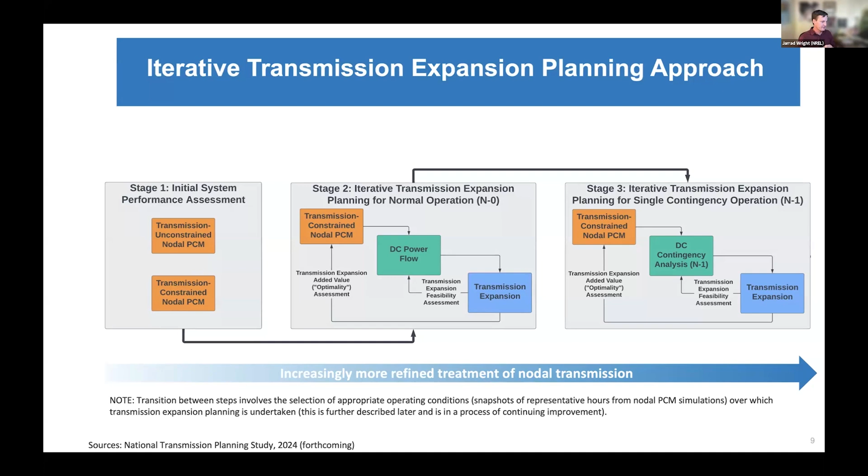Those feasible futures I'm going to run through in the next two slides, but not necessarily with the intention of sharing the NTP nodal solutions and outcomes. A lot of that will be published during the back end of summer this year, but primarily the intention is to share an understanding of the types of futures we're seeing in terms of interregional transmission expansion.

This will be used as part of the EI—in this specific case, the AC transmission expansion in 2035. We intend to use part of this as part of the IRTOC project, leveraging off what had already been done to get a deeper understanding, not necessarily of this perfect foresight day-ahead hourly nodal production cost, but going into more detail around the various coordination configurations we've been speaking about.

So just to give a brief overview of these futures and expansions: we intentionally focus on interregional transmission, but any enabling intra-regional transmission is also expanded—getting localized pockets of new resources out and towards load centers, moving power across regions that are not necessarily adjacent to each other. They need to move a lot of power, for example, from SPP across MISO towards PJM, and potentially from Florida into the southeast, and the inverse from SPP and MISO down into the southeast and FRCC, when looking at the EI.

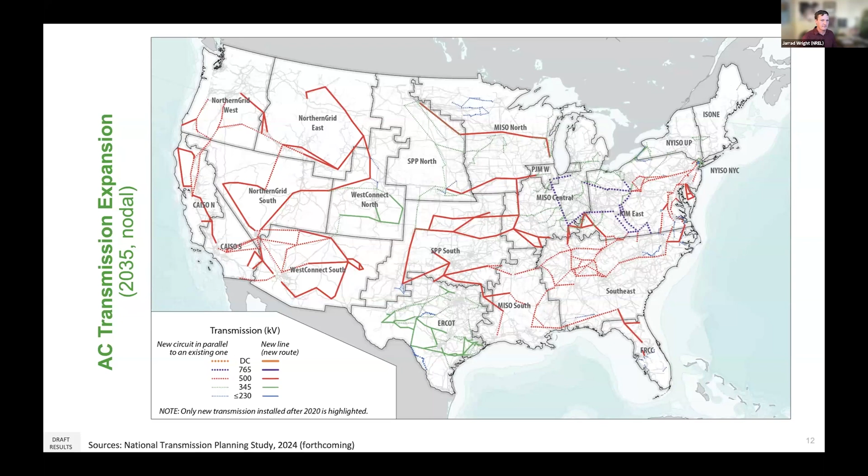We want to see the type of HVAC as well, whether that's intra-regional to collect and send bulk amounts of power across longer distances, or whether that's to support contingency performance when you have large outages on HVDC parts of the network, so that you can still transfer power interregionally across the major regions where you see the dominance of the HVDC networks. Very similar, as you can expect, because we use the capacity expansion zonal outcomes, but this is now the specific nodal realization of that.

And the starting points are, number one, multi-terminal HVDC networks already by 2035, as well as in some cases, for example in WestConnect, parts of SPP, already the potential for meshed HVDC. Operations within those I'll start to talk about next, but it's important to remember that will be quite novel in terms of operational challenges and opportunities.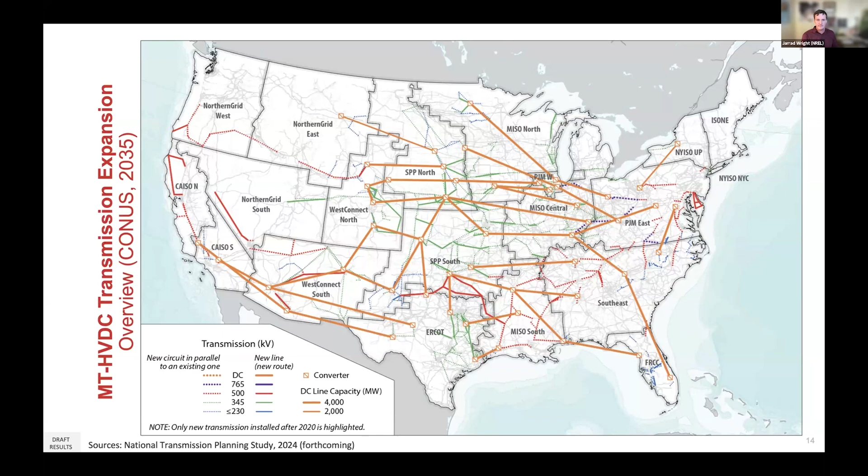Now, as I was mentioning, these are those idealized day-ahead types of interfaces and the types of flows that you then see. And as part of IRTOC, the intention is now to start to think of different operational coordination mechanisms and start to test that at scale for some subset of the Eastern Interconnect - the SPP-MISO, MISO-PJM types of interfaces - and the types of flows that we would then actually see when moving from these decision models towards emulation models, starting to actually emulate those and the coordination mechanisms that support it.